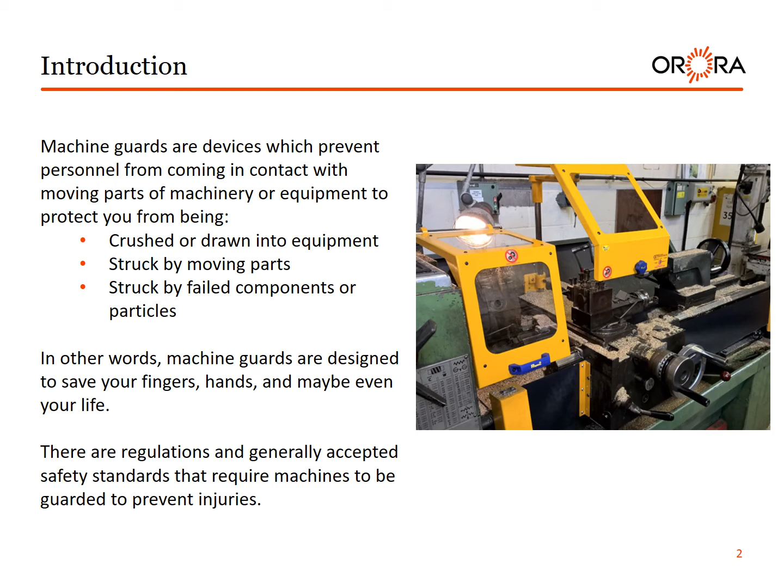Safety responsibilities. Managers and supervisors: ensure all machinery is properly guarded, train coworkers on specific guard rules in their areas, ensure machine guards remain in place and are functional, and immediately correct machine guard deficiencies.

Coworkers: do not remove guards unless the machine is locked and tagged. Report machine guard problems to supervisors immediately. Do not operate equipment unless guards are in place. Very important.

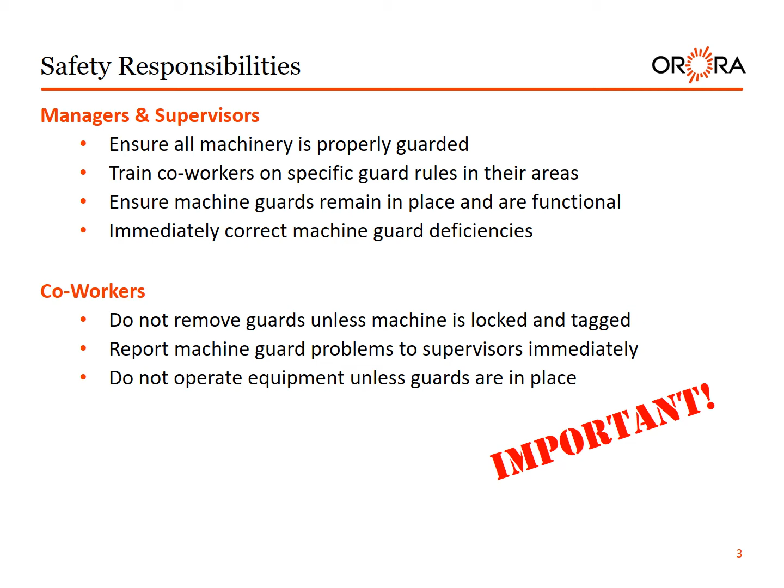Key machine parts. Point of operation: where work is performed on the material, such as cutting, shaping, boring, or forming of stock. Power transmission device: transmits energy to the part of the machine performing the work, including flywheels, pulleys, belts, connecting rods, couplings, cams, spindles, chains, cranks, and gears.

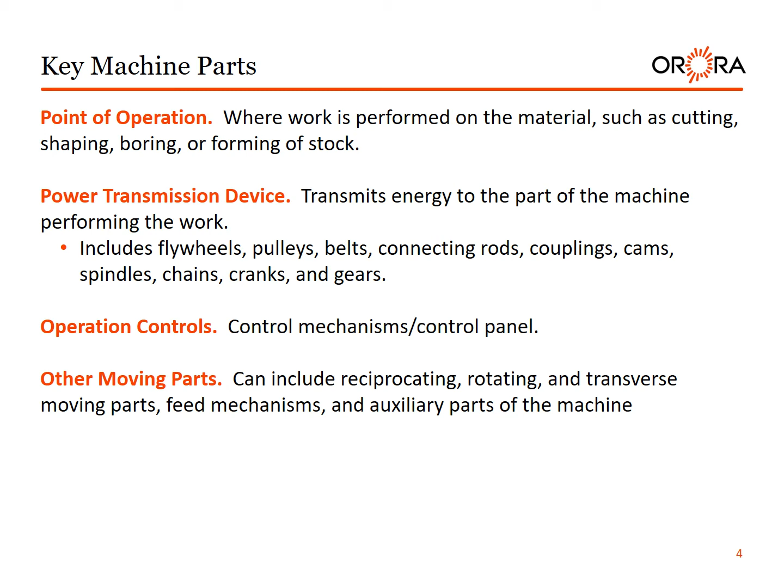Operation controls: control mechanism, control panels. Other moving parts can include reciprocating, rotating, and transverse moving parts, feed mechanisms, and auxiliary parts of the machine.

Hazards to be guarded: in-running nip points, belts or gears, rotating parts, flying chips or sparks, and parts that impact or shear.

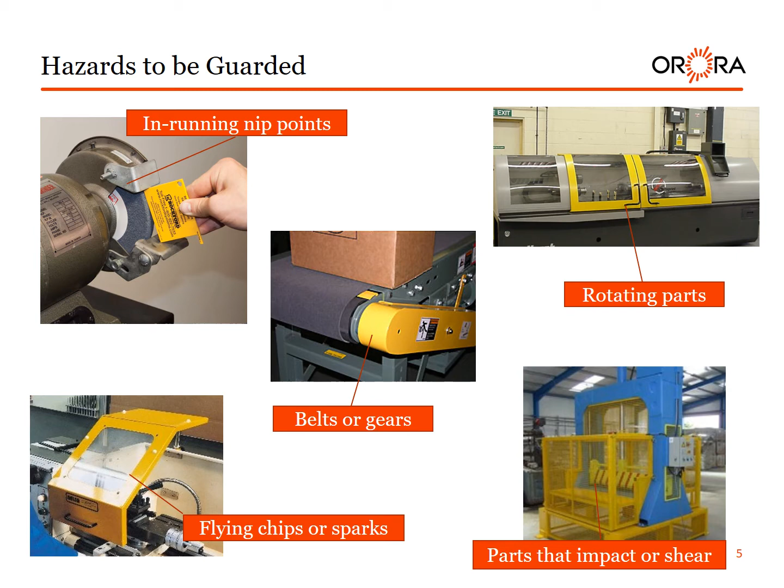Rotating parts can grip hair or clothing, forcing the body into a dangerous position. Projecting pieces increase risk.

Precautions around rotating parts: never wear gloves where there is a risk of being pulled into a machine. No loose clothing or jewelry. Tie back hair. Use breakaway high-visibility vests.

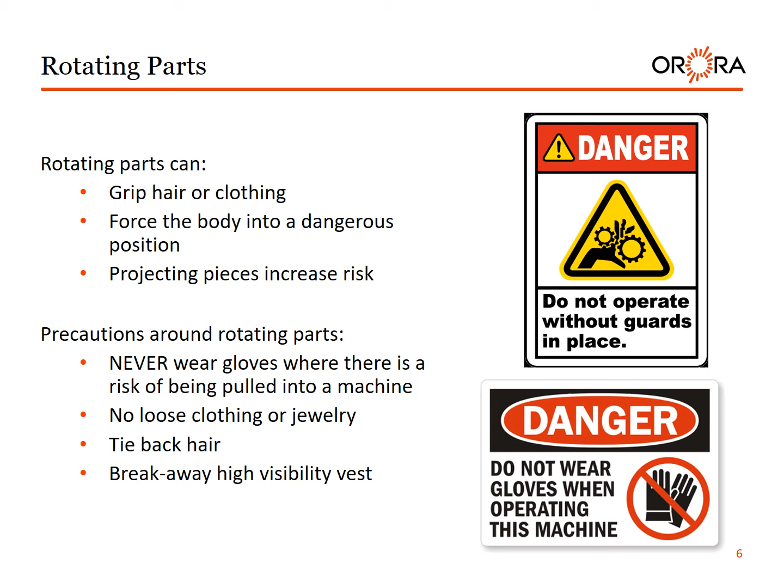Guarding principles. When designing guarding, the following principles should be used: guards should prevent contact between moving parts and people; guards should be secured and not easily removed; guards should protect against objects and people falling into machinery; guards should not introduce a new hazard, such as sharp or rough edges; guards should not interfere with the job; and guards should allow for basic servicing, for example lubrication, without having to be removed if possible.

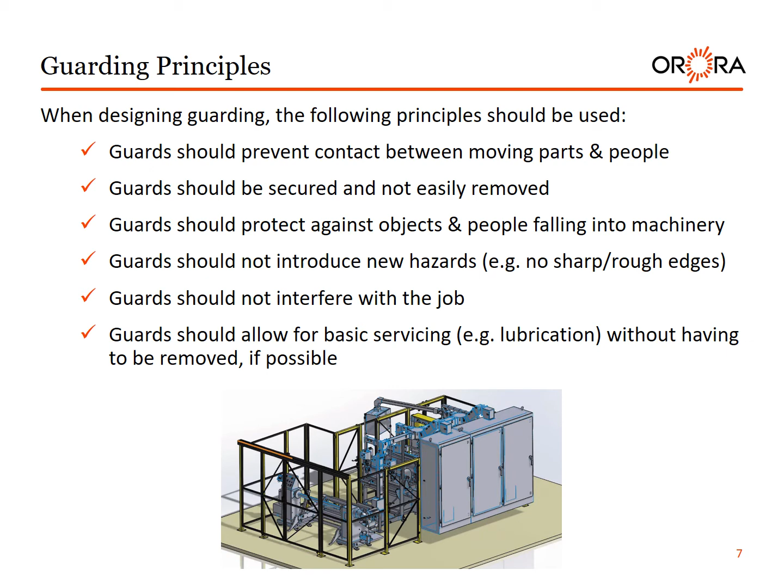Guarding methods: physical guards. Fixed guard: a permanent barrier, the preferred method. Interlock guard: stops motion when the guard is opened or removed. Adjustable guard: barrier may be adjusted for variable operations. Self-adjusting guard: adjusts according to the size and position of material.

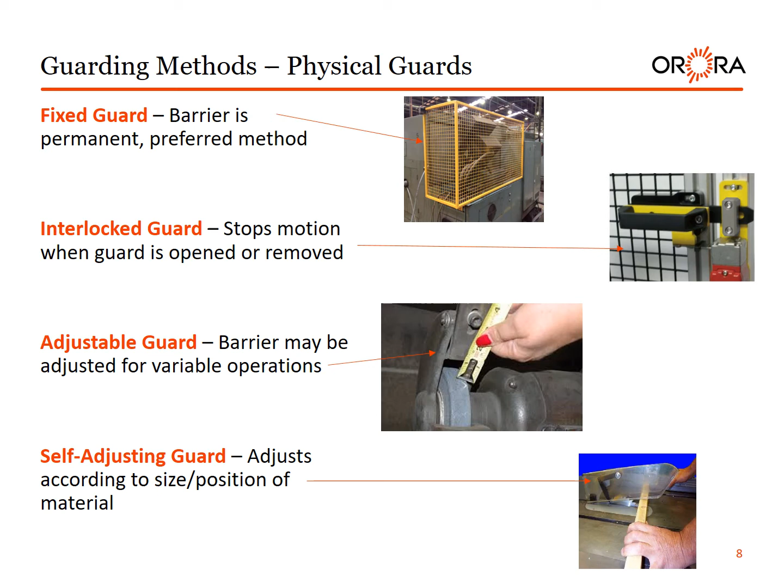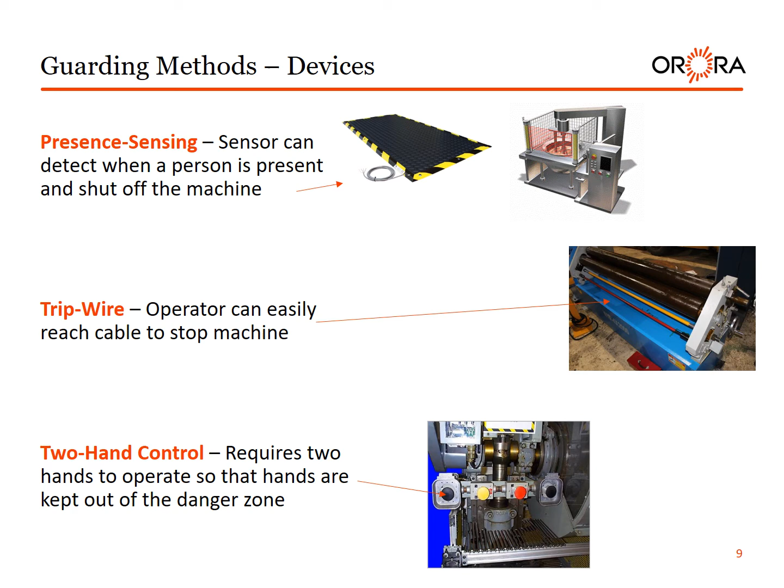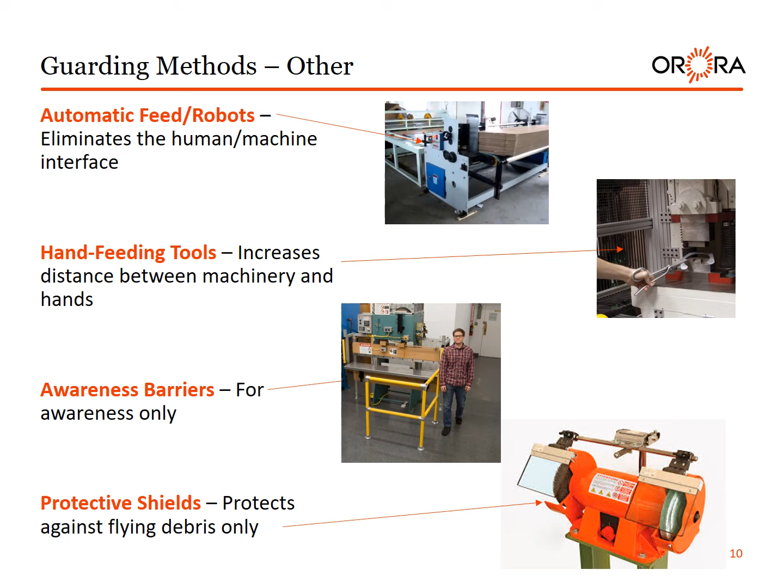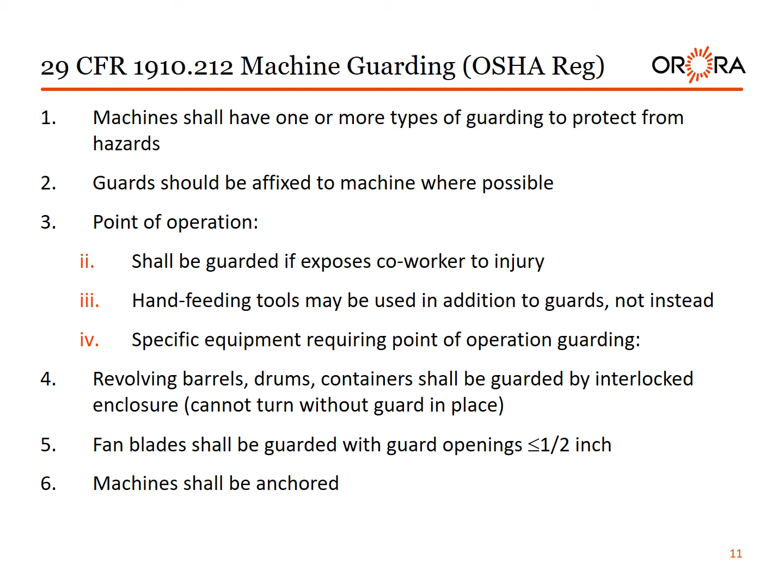Specific equipment requiring point of operation guarding: revolving barrels, drums, and containers shall be guarded by an interlocked enclosure that cannot turn without the guard in place. Fan blades shall be guarded with guard openings of half an inch. Machines shall be anchored.

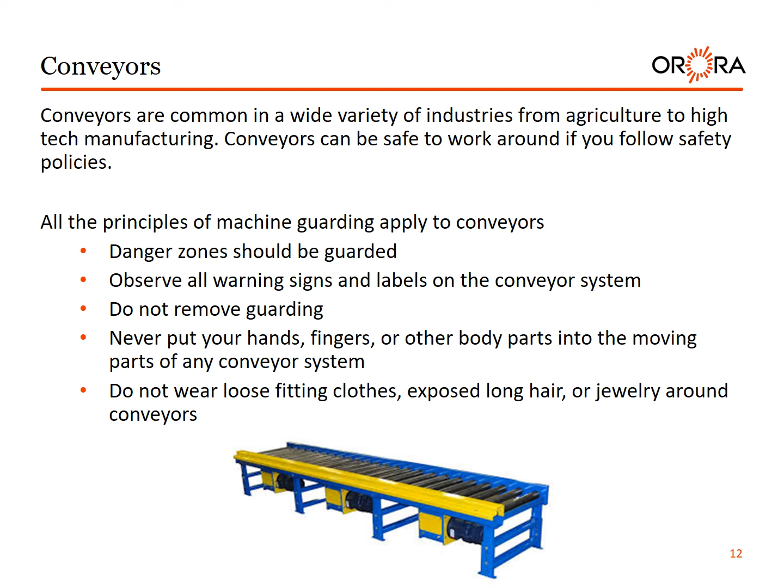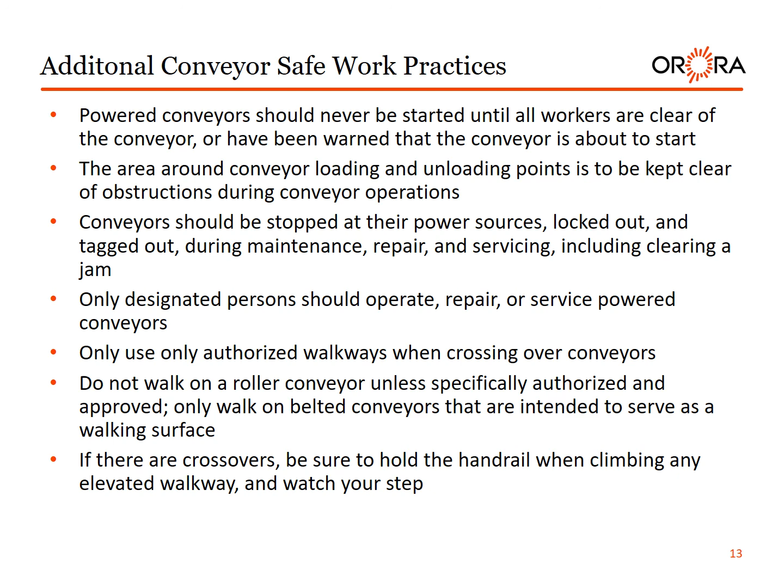Do not walk on a roller conveyor unless specifically authorized and approved. Only walk on belted conveyors that are intended to serve as a walking surface. If there are crossovers, be sure to hold the handrail while climbing any elevated walkway, and watch your step.

Conclusion. No matter what your particular job description or responsibilities are, you need to be aware of what's going on around you at all times and do what it takes to make your workplace accident and injury-free. Remember, all the machine guarding and equipment in the world won't do you any good if you disregard safety policies. Think about safety before every task you perform.